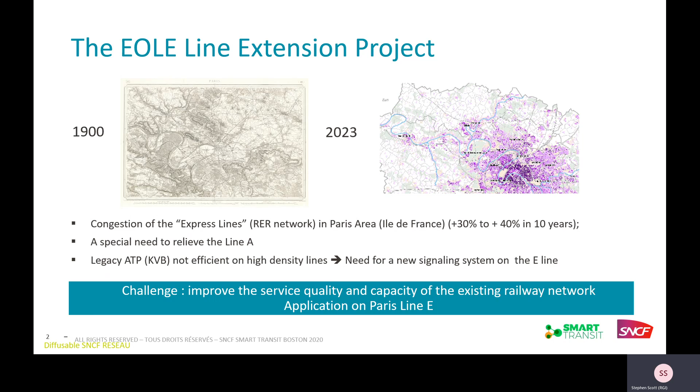This is in order to address the increasing demand on transportation from the east side to the west side of Paris and vice versa. Nowadays, the line is operated with 350,000 passengers a day, and we know that by the opening of the westbound, we will probably have around 600 to 700,000 passengers a day.

We have an east-westbound in Paris. The red line, the A line, is already over 1 million passengers a day. So there is today already - let's say before COVID, but today it starts again - we need to relieve this red line, this A line, by an additional east-westbound based on the CBTC technology.

Today we have the KVB, the ATP legacy system in France, which allows us to operate at 300, 400,000 passengers a day, but not at 6 or 7 or 800,000 passengers a day. So it looks like that.

Today the project is also a rolling stock project. We have bought some new trains, 71 new trains for the EOLE line, and in total the contract is awarded for 255 trains from Alstom Bombardier.

We call them the RER NG, new generation of train, double-deck trains. Beside this, we have an infrastructure project, the 55 kilometer extension on the westbound, with new stations, with 8 kilometers of new tunnel underground in the Paris area, from the business district La Défense to the main station Paris-Saint-Lazare.

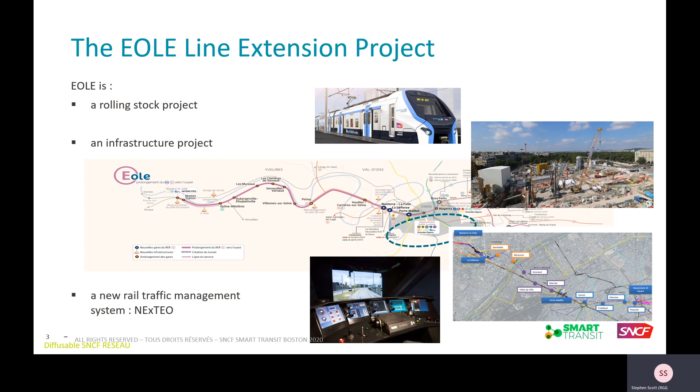We'll introduce a new rail traffic management system. We call it NExTEO combined with ATS - we call it ATS Plus on this project. It looks like that: we will have operation with the legacy system on the eastbound and on the westbound, we call them KVB. And in the middle of Paris, around 15-20 kilometers of track, we have the NExTEO CBTC system, mostly intended for performance enhancement, because we have a kind of overlay of operation.

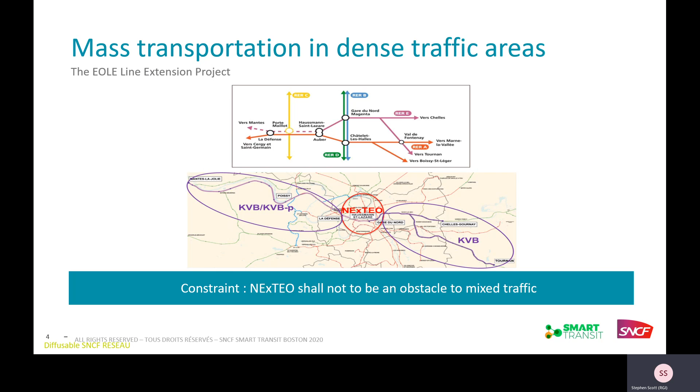The train of the eastbound turns back at the edge of the NExTEO westbound domain and goes back to the eastbound, and vice versa. The train coming from the west will turn back at the edge, at the frontier between NExTEO and the east domain, and will drive back to the westbound. So there's an overlay of the two train traffics from the east and the westbound in the middle of Paris.

This is why we need to enhance the performance using CBTC moving block. Of course, moving block in the CBTC is based on the pyramid ATP, ATO, ATS. We will implement all three systems together, starting first with the ATS for train operation and train regulation, traffic management of the line with the conventional system, and then add ATP and ATO together in the second step.

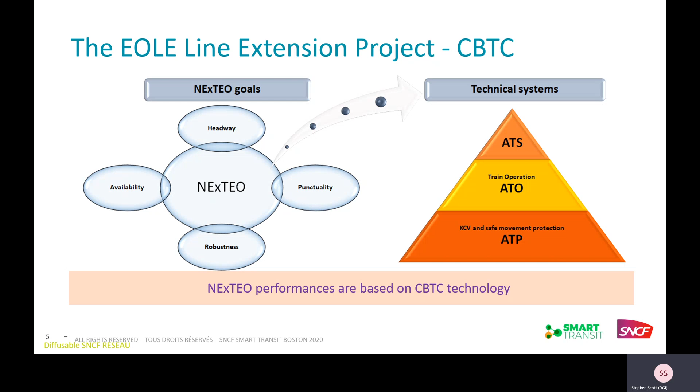In the year 2023, the challenge is to introduce this in the existing system, because the westbound will be the new line extension with computer-based interlocking and so on. But the existing part of the line is already fitted with relay-based interlocking, with different kinds of generations of relay-based interlocking.

And it's a major part of the track, because it's also operating all the traffic from the eastern part of Paris, going from Paris to Germany, to the rest of the eastern part of France, which will also be operated on this domain. So part of the domain will be CBTC, part of the domain will be conventional ATS operation.

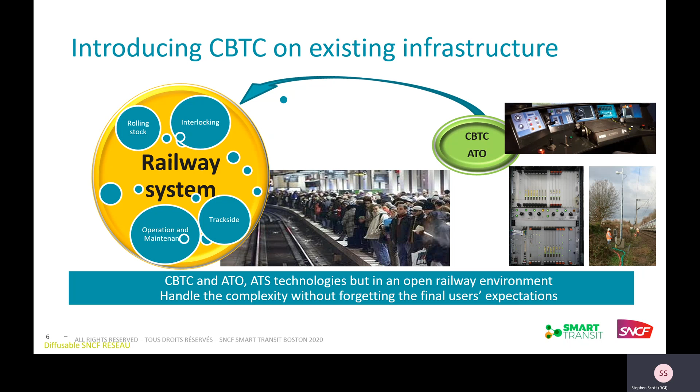This is the driver's cabin, let's say the simulator. Today we can implement the software and the look and feel, the MMI of the driver in this kind of simulator.

It looks like an ERTMS environment, but it's very similar to many CBTC environments, with a DMI, an MMI for the driver, with movement authority, or let's say target speed and some other indications about speed restriction, work zone, and so on.

This is one of the major technical improvements on CBTC for this project. This is a dynamic handover of trains from different domains, and the second technical particularity is the interoperability with ERTMS at the frontier of the system.

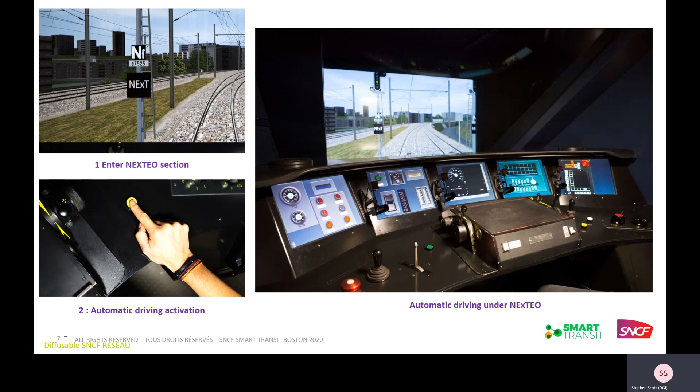So back to the kernel of this presentation. All these CBTC-based systems are based on two major functions that must be properly addressed: the train position system, train localization, and the radio link between train and wayside.

Why should we test them in this project at a very early stage? We do not have the trains, we do not have the complete system already designed and the software finished. We have most of it today, but last year, in 2019, it was not the case.

But we decided to address the risk of these two technical functions. If the CBTC radio link does not work properly, then there's no CBTC at all, and if the train positioning system does not work properly as well, there's no CBTC on this project available, whatever the different functions we put on it, like speed control, ATO, and so on.

So we decided to validate them, because there is a major difference between the conventional CBTC environment for urban traffic, like our colleagues from RATP or other metro operators. We have high-speed operation; we do not operate trains at 60 or 80 kilometers per hour, we operate at 120 and even sometimes more kilometers per hour.

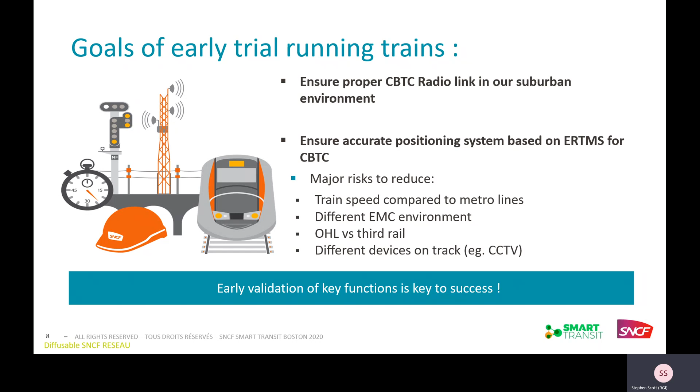During this radio trial, we had a configuration very close to the target configuration regarding the speed, the maximum speed, the layout of access points with the distance between access points, and the layout of antennas linked to these access points on wayside, regarding also the overhead lines and the power on them, and also the rolling stock, the double-deck rolling stock.

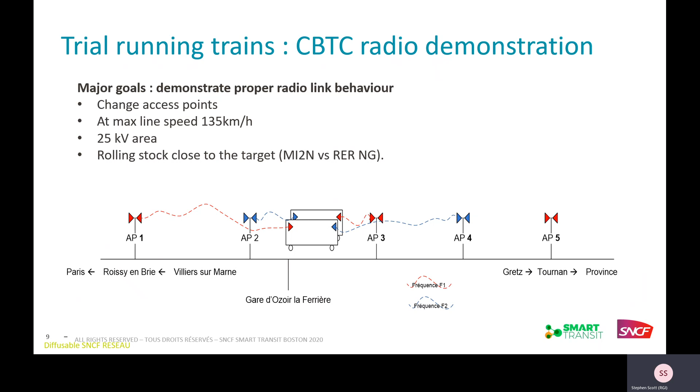So we decided to take a train very close to that, and also to choose a portion of track very close to the conditions we wanted to address, especially the speed and maximum speed, with some bridges and other constraints interesting to test also.

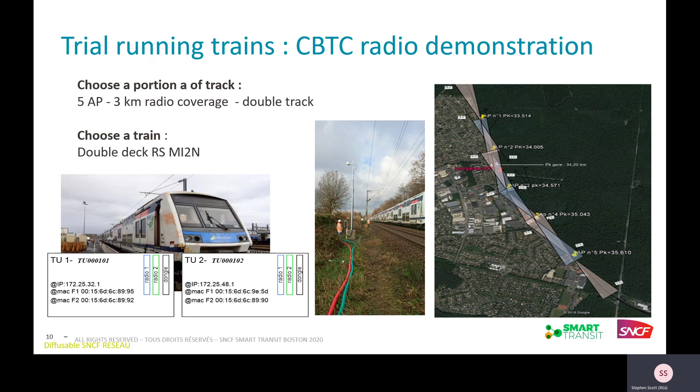So we had a portion of track of several kilometers with a few access points and a few antennas on track, with double coverage of the track, exactly as in the studies of radio layout from the manufacturer for the layout on the line, in the tunnel, and outside the tunnel.

The results were very profitable to analyze. We have a large amount of train running, with a large amount of message exchanges, with a nominal situation and some degraded situations. We provoked some degraded situations by switching off some access points, 1 out of 2 access points, and so on.

The results were interesting because first of all, the effective radio coverage is very close and very consistent with the theoretical one. This is very important for us because the manufacturer had a design on a theoretical basis, with modelization of the line, the tunnel, and the track, and the distance between the access points and the orientation of the antennas.

These have been fixed only theoretically, and so on have been fixed only theoretically. We are currently implementing the fiber optic and the power supply for these future access points and antennas that will come in the second step. So if we have to change something, it will be too difficult and very costly to adapt the layout. So it is lowering the risk of future changes in the layout by having these results.

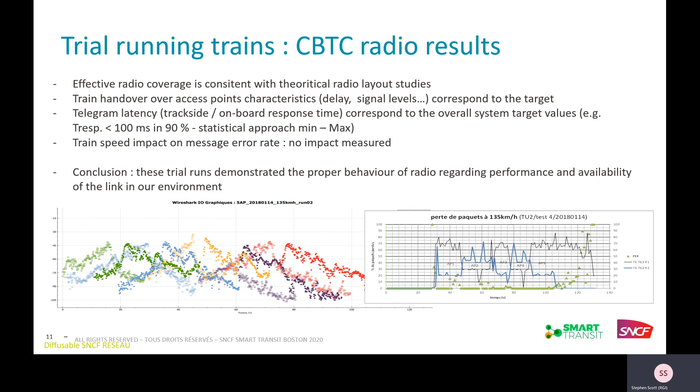So this conclusion allowed us to be confident for the next steps: deployment, installation, and oncoming testing in the next 2 years, regarding the radio. So I propose to move to the second topic and the second key function we want to check.

This is the CBTC train positioning with the new system of balise. What is very different from the existing solutions already proven by our manufacturer is that we do not use the conventional DigiSafe balise our manufacturer Siemens usually uses for this kind of CBTC system, but we enforced the use of Eurobalise because of maintenance constraints, but also because of interoperability concern and transition concern. So there was a technical choice that must be validated by this demo, by this mock-up.

So we implemented this also to address the issue of train speed as well. Same for the radio, this is very different from the train speed in tunnel with metro lines, again double that of conventional metro in Paris. So what about the accuracy of that? What about the robustness of reading all these balises?

We were also quite confident on this, because we have the Eurobalise used on high-speed lines on the SNCF network, but not used with the technology of the manufacturer combining CBTC DigiSafe technology and ERTMS balise reading technology.

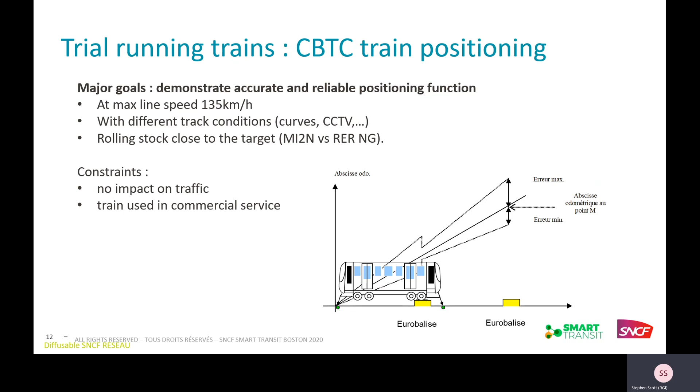Different conditions also of rolling stock, double deck rolling stock with a different height of balise antenna position regarding the balise on the wayside. So we implemented the complete onboard unit, or at least the necessary part of it, with the different sensors for speed and for balise reading on the wheel set.

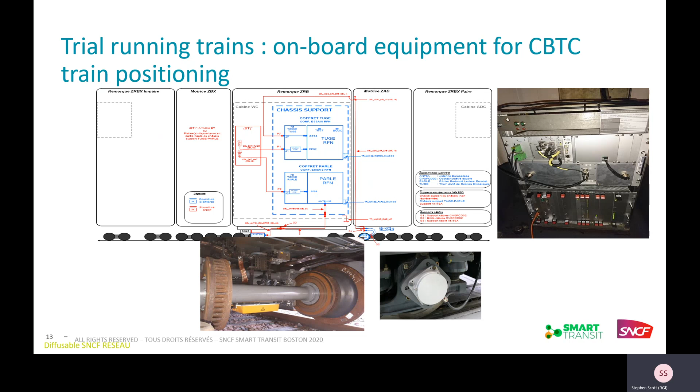And here's the timeline of this sub-project. It lasts something like 1 year, from equipping the fittings of the train and the wayside, with the studies associated to that, and gathering some thousands of balise readings within a few months.

Half a year of monitoring of the train positioning system, that means a few thousand balise readings. Here on the left of the slide, you can see typically a Eurobalise with the CCTV for the train driver and platform communication video link. That was also one of our concerns, about what kind of precision in balise reading we have with this kind of balise layout and proximity to the CCTV antenna.

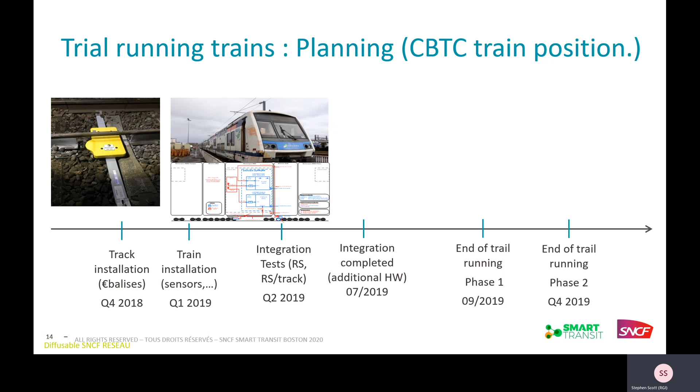There were different kinds of configurations of layout to address. Typically, in this kind of system, we are very sensitive to the speed. We are sensitive also to the other systems, the mass, the metallic mass, the KVB, the other balise close to this. We are sensitive to curves, of course.

Balise reading in curves can be an issue, and we are sensitive also to the track bed and the kind of sleepers. We have 17 types of different sleepers on the CBTC domain on the E-line, due to historical reasons of the different phases of the line, the different manufacturers, and the different maintenance operations over the last 30 years.

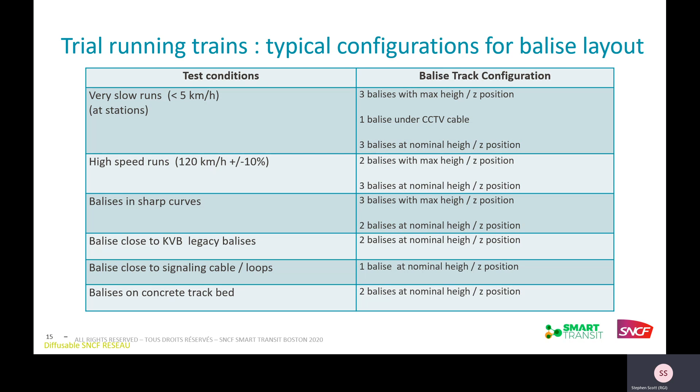So in this case, we have different environments: wood, concrete sleepers, and so on. So we address all these kinds of configurations on the line to have a real representative set of configurations. I will not detail the different runs, but this is typically the kind of runs we had.

At night, mostly when we were trying to make some specific measurements in order to have specific high speed, for instance. But during the day also we have conventional runs, and the trains were operated with passengers. In this case the train was monitoring and gathering the balise reading, and we could just take the log once a week, for instance, to pick up the necessary information and interesting statistics from the onboard computer unit of the train.

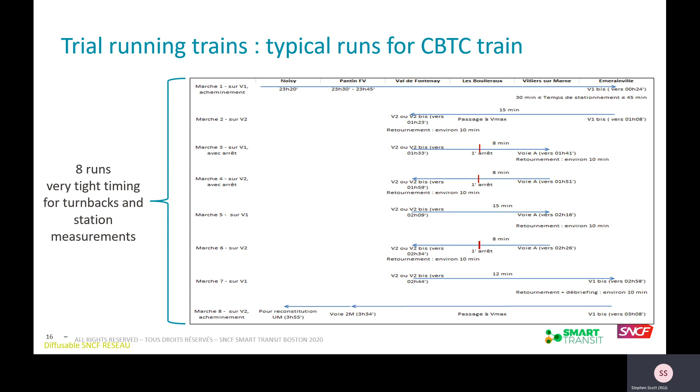And we can see that we are, of course, very sensitive regarding the power, let's say, of the level of message reading and balise reading from the antenna. We are very sensitive to the position, to the distance from the train antenna and the wayside balise, of course.

So depending on the train and the erosion of the wheel, of course, during the months and the years, the train antenna position will change, and all the trains are not completely similar, of course. So we have to be robust to a wide range of distance, and we have assessed that in fact we are very close to the theoretical results, even much better than what we thought.

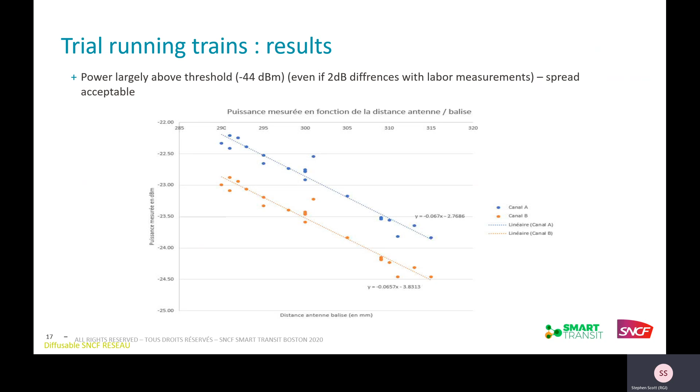And we are really above the threshold we have in the target. More interesting is the accuracy. This is typically the results we obtained. We should have, regarding the main lobe, an extension of 60 centimeters that allows us to have a very accurate train position, estimating the middle of the lobe.

We have the precision and the accuracy of the train when running on the balise, and recalibrating the position of the train. The theoretical lobe measurement was 64 centimeters for the lobe, regarding a given level of 44 dBm. For this kind of measurement, with several thousand balise readings, we got a stable range of 60 centimeters plus or minus 1 centimeter. So something very clean and with robustness of balise reading.

Both criteria have been, with highest priority, observed and monitored during this trial running.

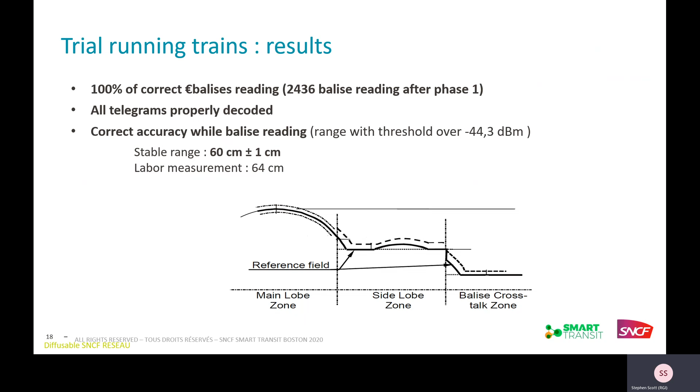So thank you, and this is the last slide, just to show where we are on the project. The trial running on a V-cycle. We're at a very early stage in 2019 during the design phase. We have ended the design phase on this project.

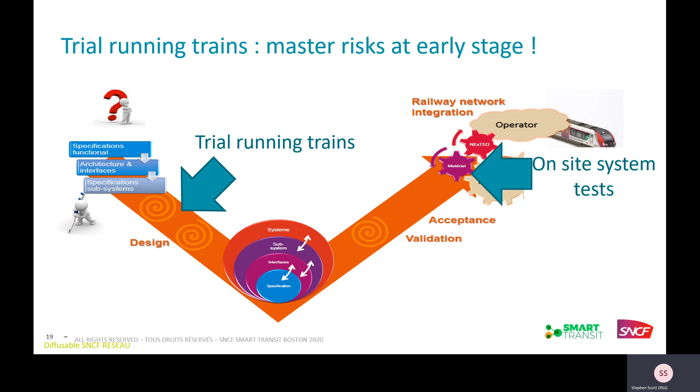We are just ongoing with installation, and we have some tests and validation, mostly on the manufacturer side, and some started on the operator's side at the SNCF. And of course, we will have on-site testing in 1 or 2 years with the full system configuration, and we'll be very happy to rely on these two core functions. Hopefully, we expect that there will be no surprises, at least on these two functions. Thank you very much for your attention, and enjoy the Congress as well.